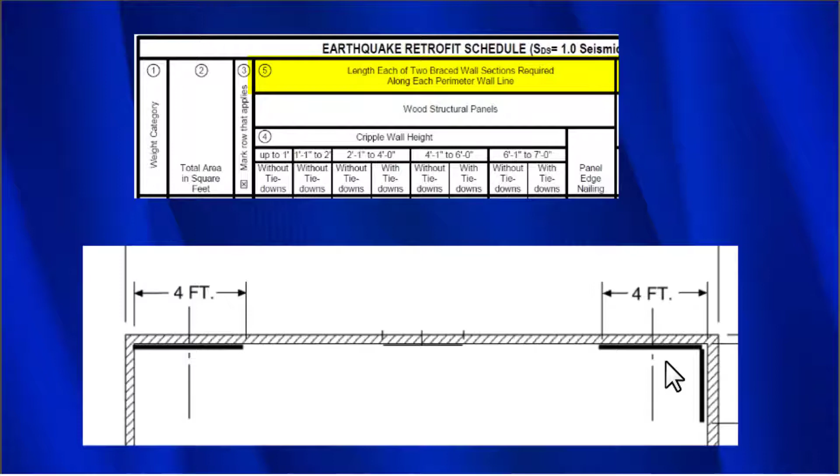From a contractor's point of view, when he has to move all his equipment in two different places, it costs a lot of money. So let's say he's here and he's got all his bolts, drills, and equipment, dragging the plywood in, all that stuff. Let's say the access is over here. So he comes in, and what he'll normally do is find the one that's closest to the access where there aren't a bunch of pipes and stuff in the way. Then he'll make his panel as long as required, rather than dragging everything over here and doing the whole thing all over again.

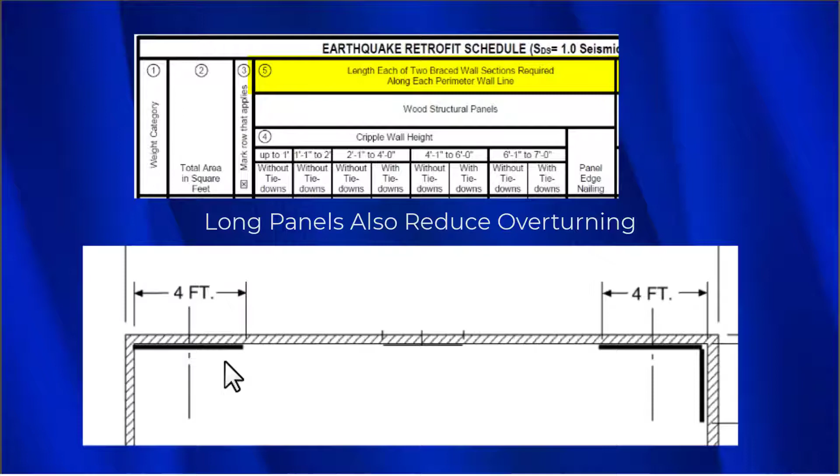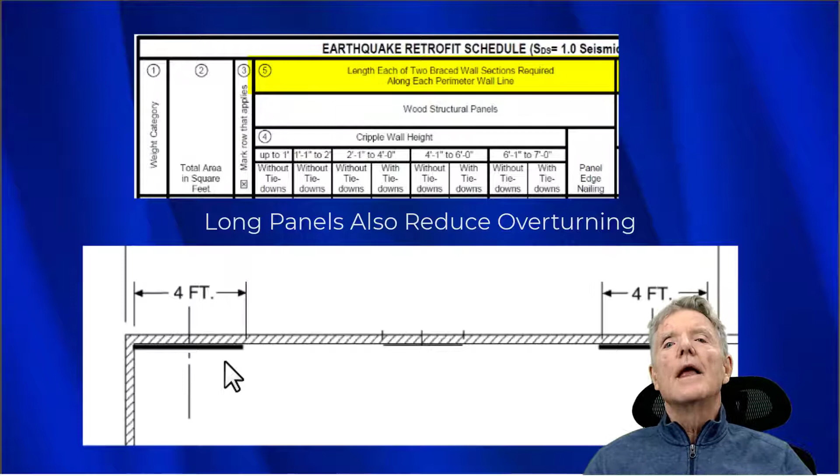Now, it is a very easy procedure to make it so it does not matter where you put it. A contractor can go under the house and figure out, okay, I need to put in 12 feet here, should I put it on this end or that end, am I going to remove plumbing, do I have to remove ducts, find the easiest place to do it, which in turn is cheapest for him and cheapest for the owner. The only thing that needs to be done is to tie the upper top plates together.

Right now we're going to look at the method by which FEMA P-1100 addresses breaks or joints in upper top plates. So this right here is a joint, a break where two top plates meet. This section of top plate is coming on this side, this section is coming on this side, and that's because lumber sometimes comes in 16 or 20 foot lengths, and if a cripple wall is say 50 feet long, you're going to have a couple pieces with these breaks.

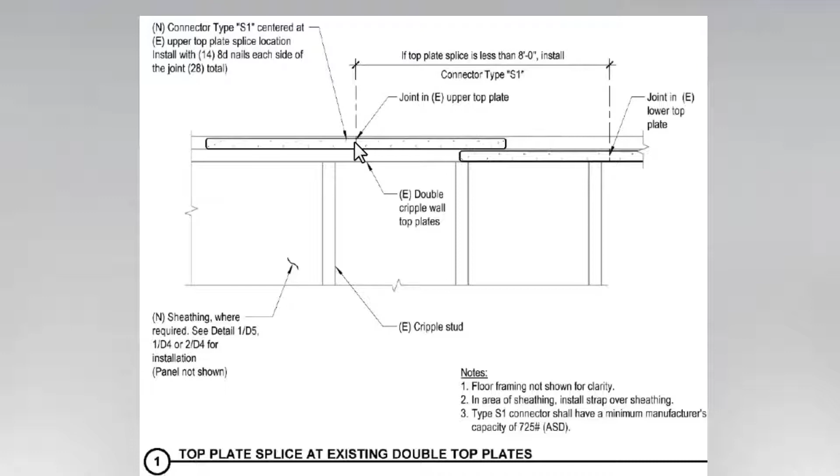Now the problem with breaks is this right here. If you have a cripple wall that's this long, and over on this one side is the only place you can put a shear wall, and there is a break right here, what happens is all the load goes this way to the left of the break. And when it does so, that load cannot make it back to the shear wall, which is nailed into the upper top plate. That's why addressing these breaks is so important.

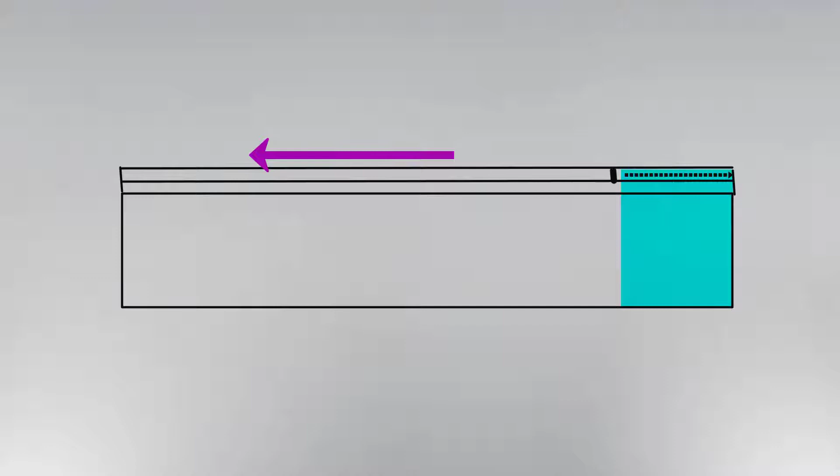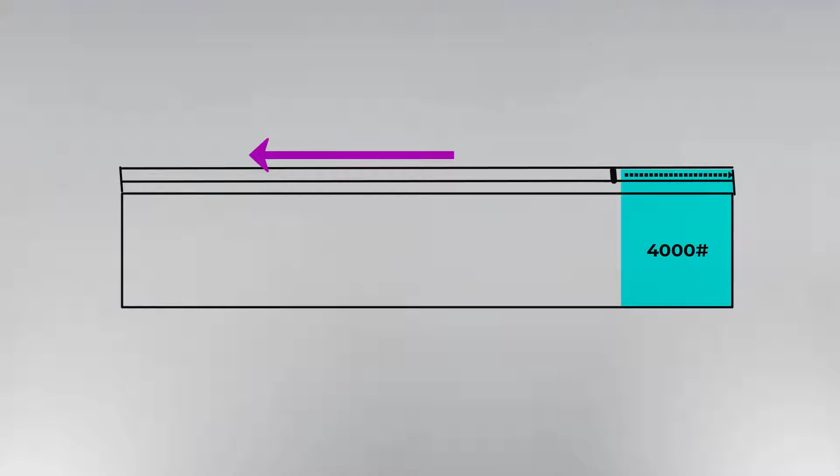Now FEMA P-1100 requires that these straps have a capacity of 725 pounds. And I wonder if that's enough. Let's say this shear wall is supposed to resist 4,000 pounds of force, and the load being dragged to it to the left of the break is 4,000 pounds. A 725 pound strap is not going to be sufficient.

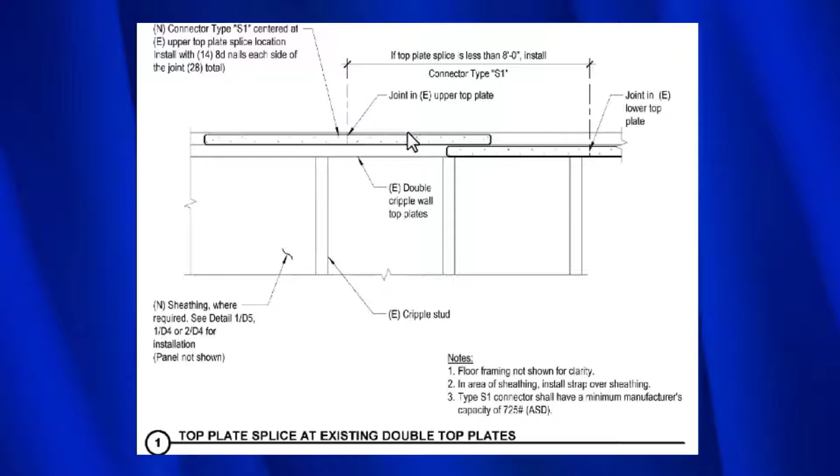As we just saw, all the load goes into the upper top plate. So for example, if there were joists here that you could see, all the toenails in the joist would go into the upper top plate. If you put some framing anchors in here, say some L90s, the nails would all go into the upper top plate, so that load would go into the upper top plate.

So I can't really see a reason to put a strap right here in the lower top plate. I'd like to point out, if we use a steel strap here and perhaps there's another break over here, we won't be able to put in our shear walls because we can't nail through the strap. Nor do we want to put the strap over the plywood because then it will put too many nails into the upper top plate and it might split.

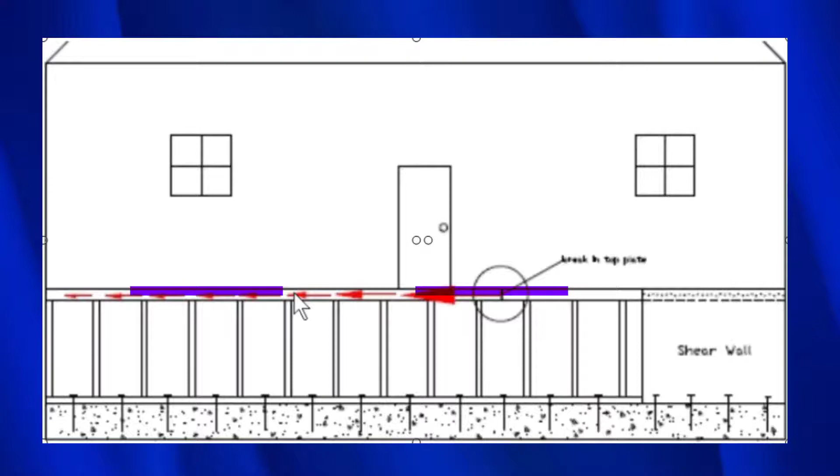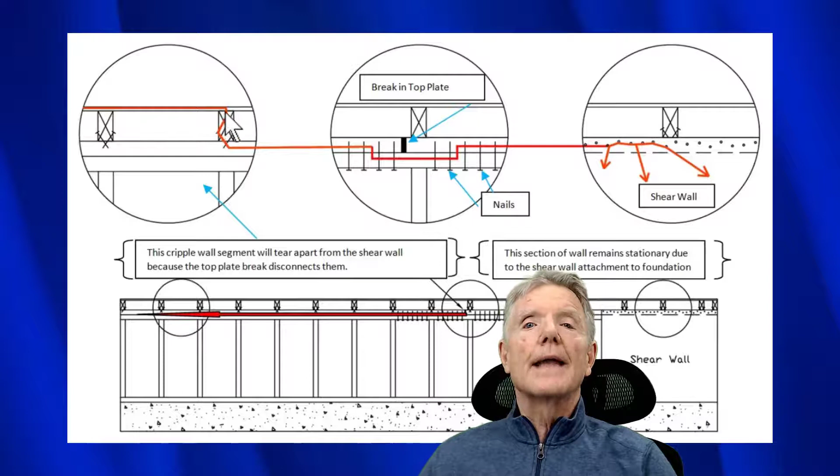So let's see what those nails do to make sure the entire house is connected to our shear wall. This right here is the floor that you walk around on, and this is a floor joist that supports the floor. You see how this floor joist has a nail that comes in here and one here, and another here and here. So when the floor tries to move, it goes into that floor joist and into the nails, which in turn go to the upper top plate.

So the upper top plate is going to move that way as the floor goes this way. When it goes that way, it pulls on these nails right here in the upper top plate. When those nails pull this way, they in turn pull down the lower top plate, because you see how the nails come up from the lower top plate into the upper top plate. So they're connected - the nails pull this way, and when they pull, they pull on the lower top plate, and then into these nails again on the lower top plate, which are connected to the nails connected to the upper top plate. So now it pulls on the upper top plate.

Which then in turn pull against the nails on top of our shear wall, and then all the force goes into our shear wall, which is right where it belongs.

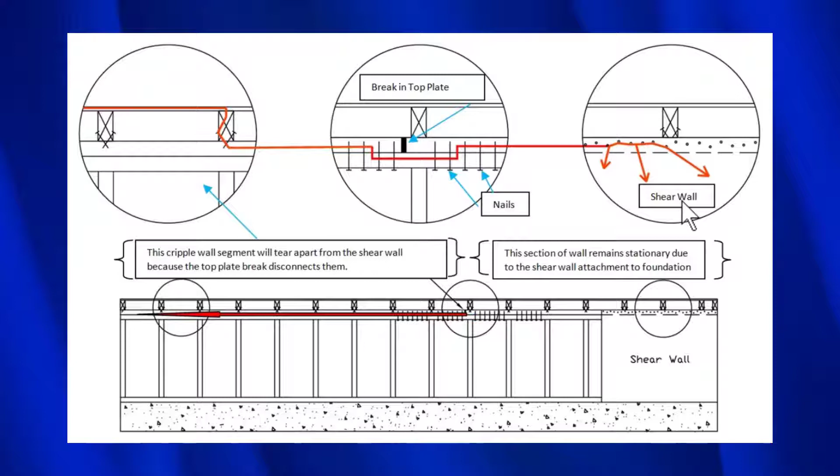So let's go ahead and look at the big picture on that. Here we have the break in the top plate. This entire cripple wall and floor and everything is disconnected from our shear wall. So now what we've done is we put a whole bunch of nails on this side of the break,

and a whole bunch of nails on this side of the break. So when the earthquake force comes this way, it travels through the nails into the lower top plate, because the nails go into the upper and into the lower. So it goes into the nails in the upper top plate, those in turn are connected to the lower top plate, so then the lower top plate goes this way, comes over to the nails right here. Those nails are connected to the upper top plate right here. So what finally happens is all the force gets pulled on that upper top plate,

and this is where all the nails are in the upper top plate. And so all the force is transferred into the shear wall where it belongs.

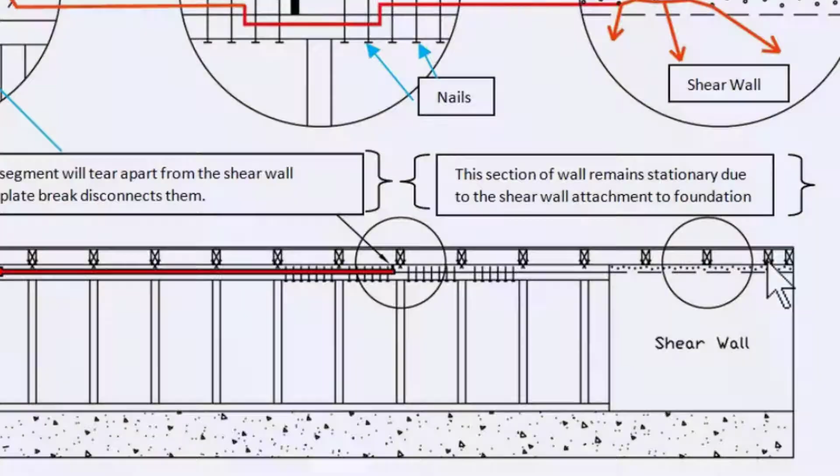Once we join the top plates together, basically the upper top plate all along here is a solid piece of wood because they've been joined together so strongly. So what that means is wherever you put the shear wall, it will absorb the load no matter where the load comes from. We can put the shear wall right here in the middle, right here on the end, or on this end, or on this end and that end if we need to.

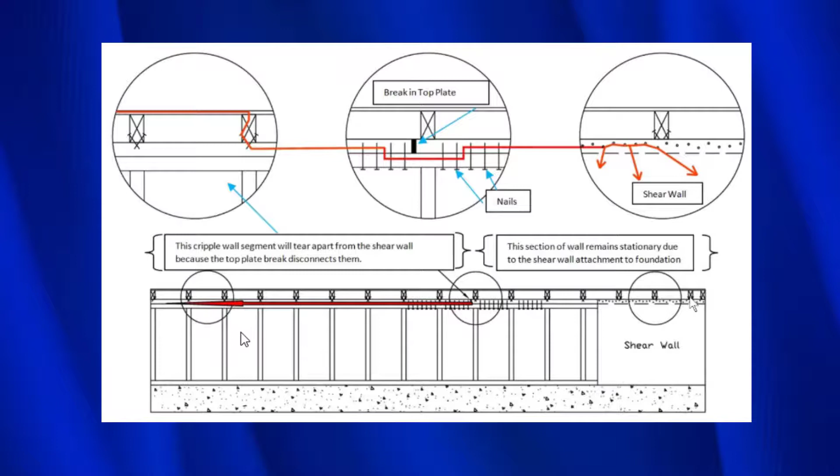In seismic retrofit work, the big problem that we always have is access. Not only is it difficult to work in because there's very little clearance, but also there's just all kinds of junk on there that you would not see otherwise. Underneath a house, they don't care what it looks like. They'll throw crap everywhere, put everything on the wall. They put heating ducts along the wall, pipes, plumbing. They just put all kinds of junk up there.

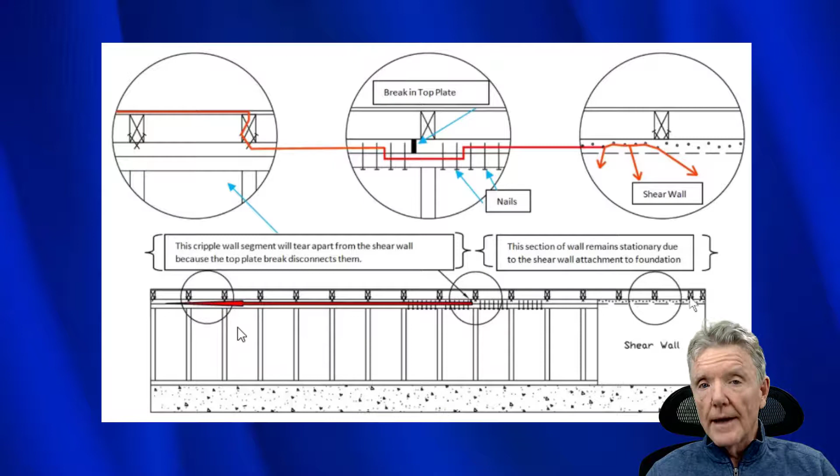From a contractor's point of view, the main thing is you just need to be able to work at one location, so you don't have to drag your tools around. At the same location, you put in the bolts because all earthquake load goes into the bolts that are attached to the plywood, and then you do the same for your framing anchors up above. So you can do everything in one spot. Saves a whole lot of time, saves a whole lot of money, and saves the homeowner a lot of money, making the retrofit more affordable.

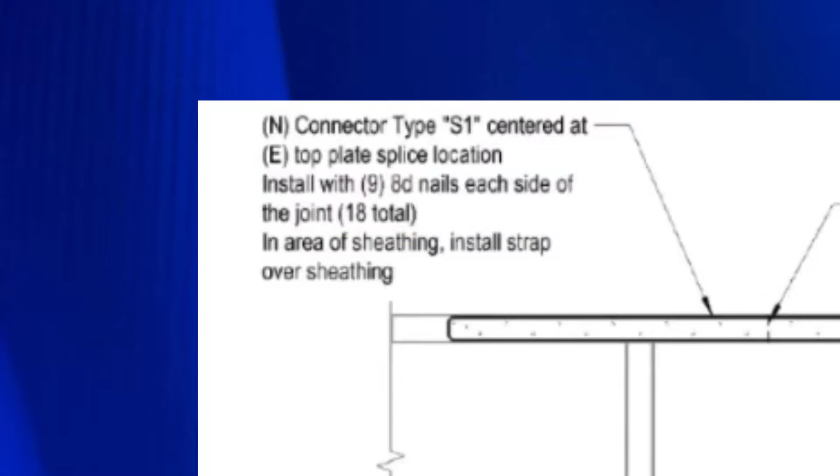This detail is interesting because it says here that it should be installed with 9 8-penny nails each side of the joint. I looked in the Simpson Strong Tie catalog, and it doesn't make any straps that take 8-penny nails. All the nails that are in the straps are 10-penny nails. So someone needs to take a look and see if there's a reduction here, especially in light of the fact that these straps are supposed to resist 725 pounds. Someone needs to check and see if there is a reduction there.

Another way to do this is to nail up the plywood and then put a 2x4 on top of the plywood and screw SDS screws through the 2x4 and into the top plate. Now it's very critical to get the lags in the center, so one only needs to snap a chalk line to make sure that happens.

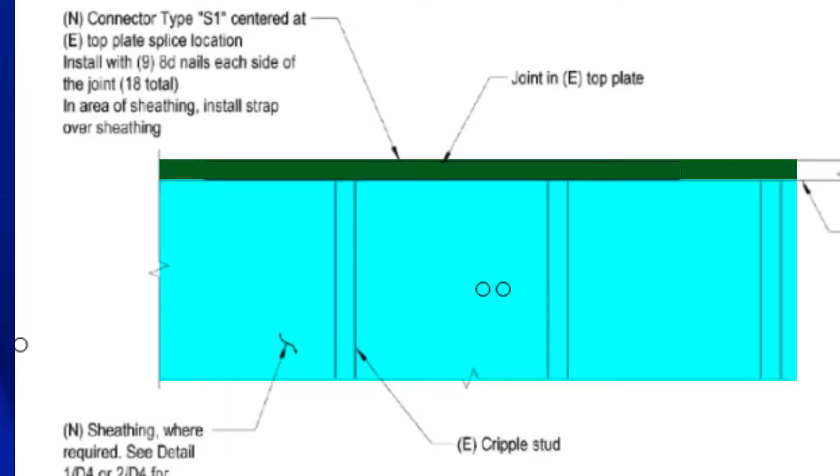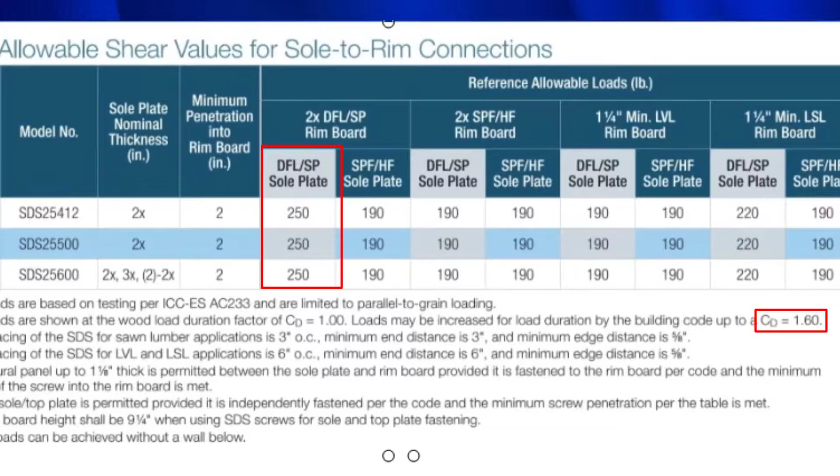Let's see how much capacity we can get out of a 2x4. The Simpson catalog tells us that the SDS screw can resist 250 pounds per screw. Now we can take that 250 pounds and multiply it times the short-term load multiplier of 1.60. We end up with 400 pounds per screw. If we put 10 screws on either side of the break, we will have a capacity of 4,000 pounds in this 2x4.

This is a situation we run into fairly often, and this is a plumbing stack. What that means is this is either a pipe that has 3 inches or 4 inches in diameter, and see how here it breaks this top plate and it also breaks the lower top plate. So we've got a real problem because sometimes, when they break these out, there'll be 3 inches on this side from the pipe and there'll be 3 inches on this side from the pipe. So the total span here is about 9, maybe 10 inches.

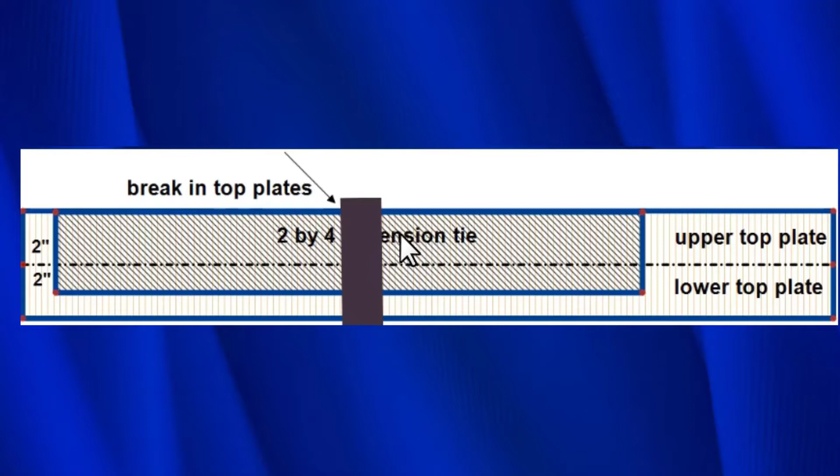The problem is that earthquake forces will be pushing this way in compression and also pulling this way in tension, so we need to do something about that. The easiest way to do it is you simply put in a 2x4, just like we saw before, put lag screws on each side, and now we have a connection that will work both in tension and compression.

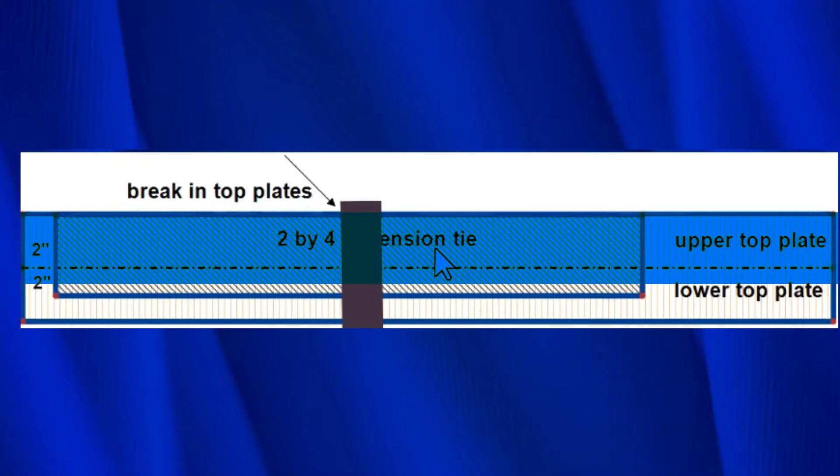Here you can see why steel straps might not be the best option in seismic retrofit work. When you drive around and look at new construction, you'll see these straps on the outside walls. The reason they're there and the reason they're flat and they're straps is because they need to put in siding, stucco, something like that on the wall, and we can't have a 2x4, obviously, in the way. But for seismic retrofit work, where no one's going to see it, the use of 2x4s often seems like the best option. You can get a much stronger connection, they're easier to install, they're cheaper, and overall a good choice.